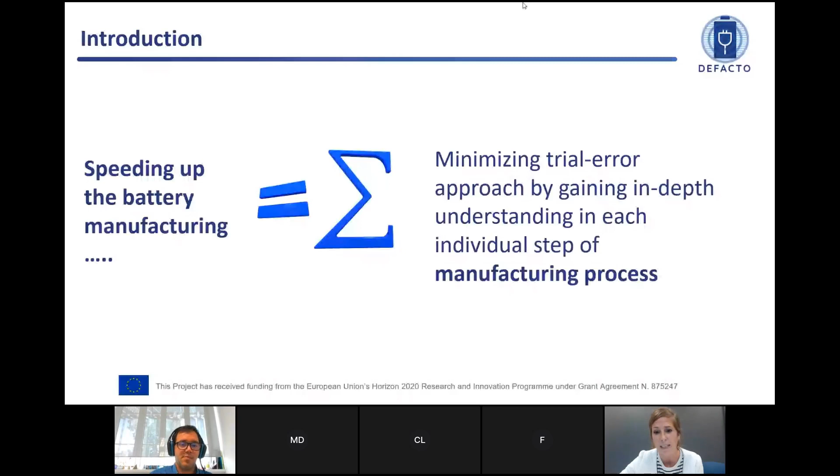One of the aims is to minimize the trial and error approach by gaining more understanding of individual manufacturing steps. Then, obviously, we have the cell, and the cell degrades along the cycling, and we want to know more about this degradation mechanism so that later we can enhance cell performance.

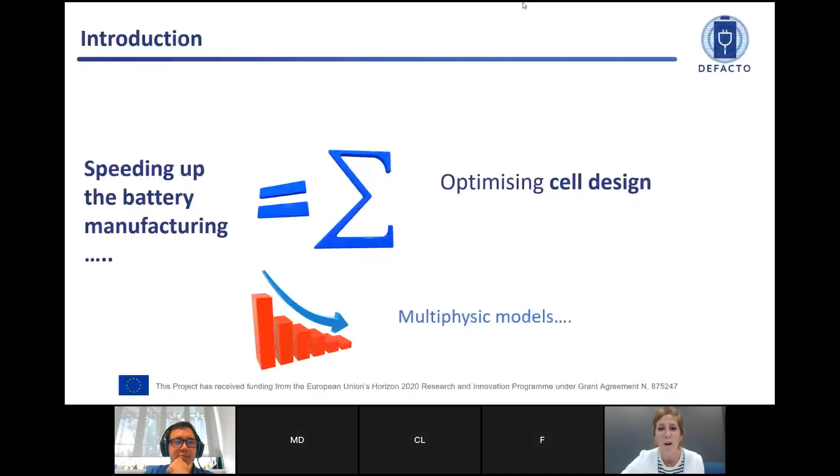We also want to optimize the cell design, and this should be done in an automatic way, linking at least to the manufacturing. So what we aim to do through the Defacto project is rely on multiphysics, because we are convinced multiphysics models can answer all these aspects, speeding up battery manufacturing.

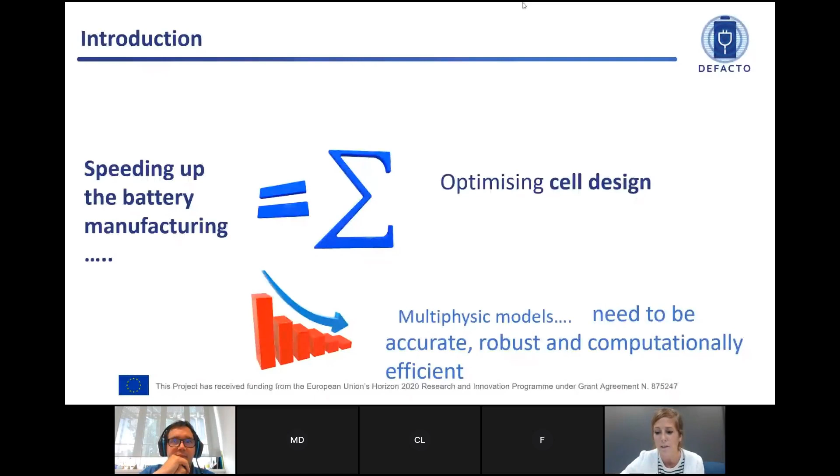But then multiphysics models need to be accurate, robust, and also computationally efficient. So for today, I have prepared and divided the presentation into 4 topics.

One is the parametrization, how models can contribute to parametrization, improving or reducing the number of experiments needed to estimate the parameters. And then on the manufacturing process.

The third part of the presentation will be on the degradation mechanisms from the multi-scale approach. And then I will finalize the presentation by giving some information on how we are proceeding in the optimization loop for optimizing cell design.

So I will start with the parametrization, and somehow models-based parametrization, in a way that we propose to reduce the time and experimental work dealing with the parametrization.

Within the Defacto project, we have more than 10 models that will be developed within the whole project, which started last year and will run until 2023. We have models related to manufacturing and also dealing with performance and aging. All of them have something in common: they are multiphysics and they cover different scales.

These multiphysics models require physicochemical parameters, and obviously you can rely on literature data. But if you have a particular chemistry, we are convinced that we have to go into detail and get insight on each individual parameter. So we have plenty of parameters.

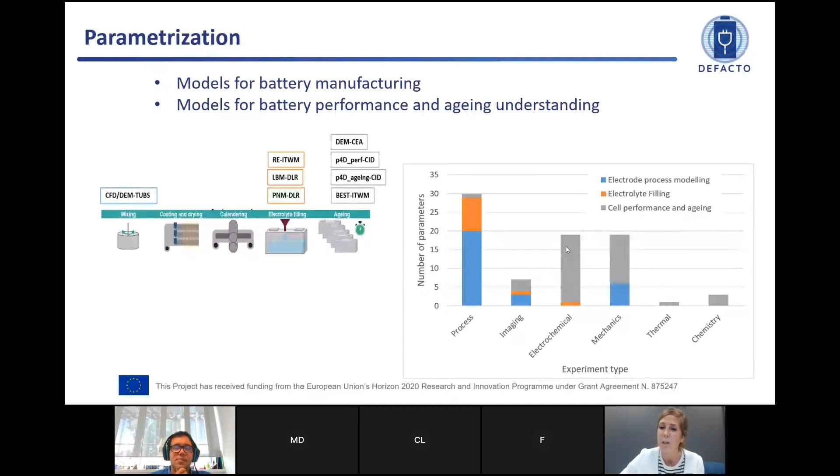Now I will show 2 examples of how we are dealing with, or proposing, models-based parametrization. Both are in the area of the continuum scale, but it gives an example of how we aim to work on facilitating the parametrization. When we talk about the continuum scale, for instance, the P2D model requires electrolyte transport parameters.

These are the 4 common transport parameters: the ionic conductivity, transport number, electrolyte diffusion coefficient, and the thermodynamic factor. Within Defacto, we have already taken measurements using experimental methods, and what is different about each individual parameter is that we need a specific method and even a specific setup.

So for instance, if we look to the ionic conductivity, we need to assemble symmetric stainless steel cells, and then perform the EIS measurements. For the transport number, we need to assemble a symmetric lithium-lithium cell, and we rely on the Bruce-Vincent method, basically a potentiostatic measurement combined with EIS spectra.

For the electrolyte diffusion coefficient, we need a symmetric lithium-lithium cell, but in this case we run galvanostatic pulse relaxation, and then we get the electrolyte diffusion coefficient. And for the thermodynamic factor, we need to assemble a 3-electrode configuration and perform CV experiments.

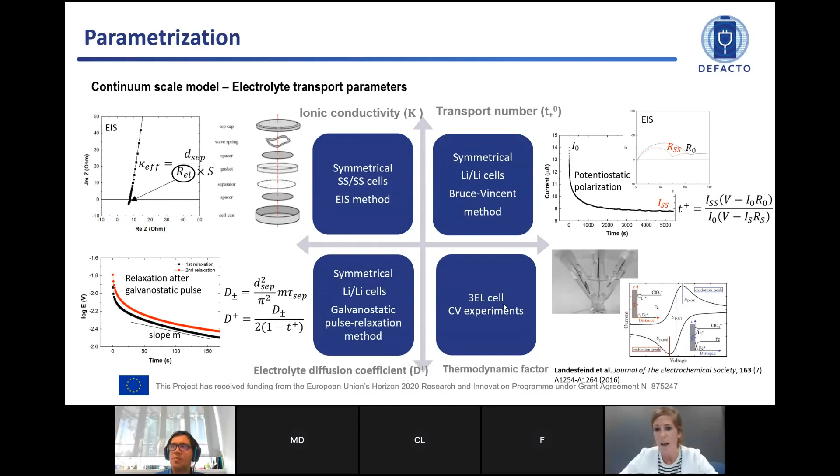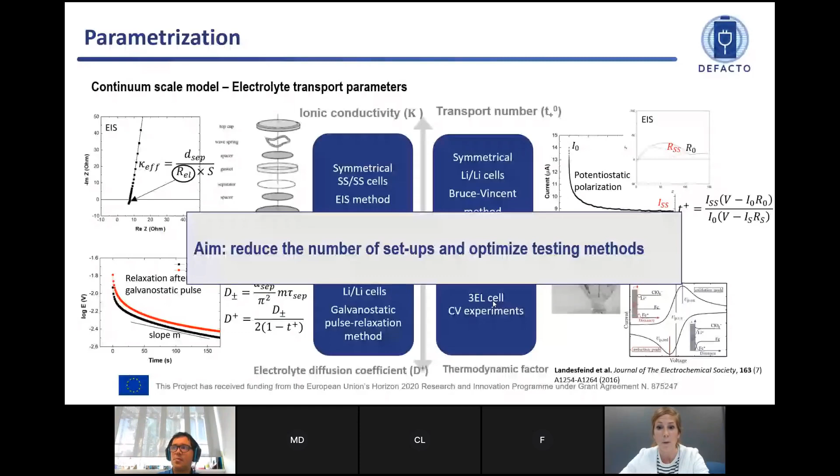So basically, this requires a huge amount of experiments. It's quite tedious and time consuming. So our aim here is to reduce the number of setups and optimize the testing methods, and this will be done by the model-based parametrization, as I was mentioning.

So here we are focusing now on electrolyte diffusivity estimation. From the experimental approach, we have to assemble lithium-lithium symmetrical cells, and then perform galvanostatic pulse relaxation. From the relaxation, if we plot the logarithmic of the voltage and get the slope of this figure, we can then get the diffusivity. But for that, we need the transport number, which we get from the Bruce-Vincent method.

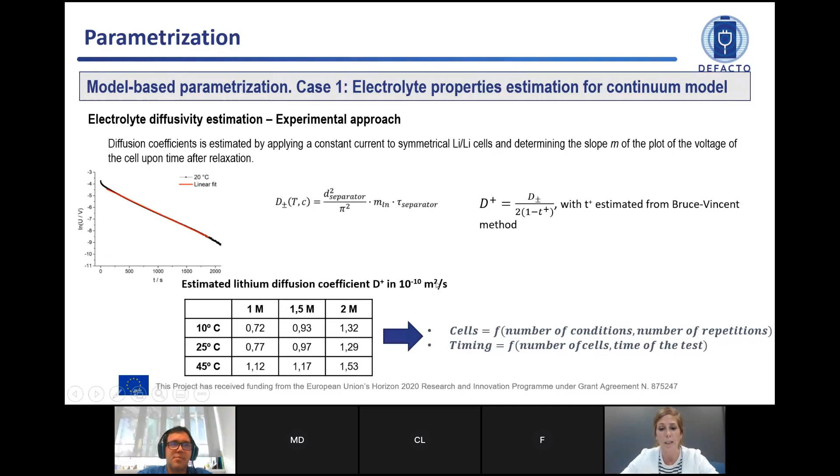So this is quite tedious, and as we know, the electrolyte diffusion coefficient depends on the salt concentration and on the temperature. So if we want to increase the number of values depending on these variables, the number of cells to be assembled would be huge, and it's quite time consuming.

So what we are proposing here is to rely on reduced order models, because in the end we need to solve an optimization problem that basically wants to minimize the error between the simulated voltage and the experimental voltage, and this is quite time consuming. So we need efficient codes or efficient models that mimic all the multiphysics, then perform this optimization algorithm to estimate the specific parameters.

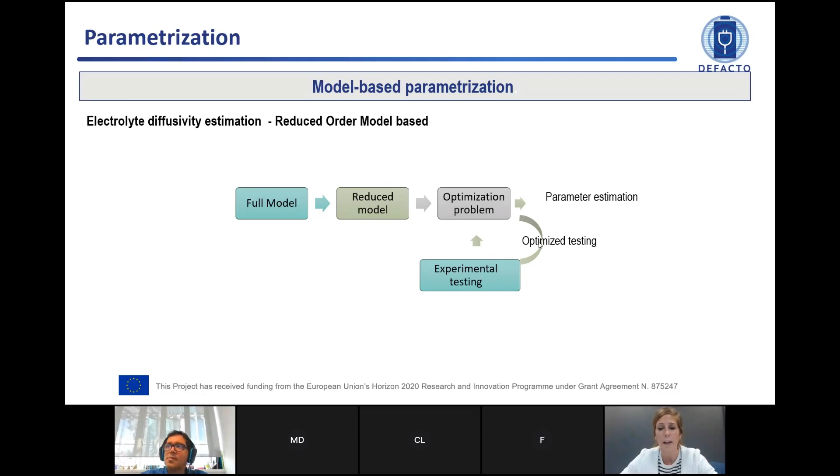So we need to have the full model, then we build the reduced model, and we implement, for instance, quasi-optimization problems to first optimize the testing in order to evaluate and get estimation of the parameters properly, efficiently, and accurately. So for the case of the electrolyte diffusion estimation and the pulse relaxation method, this is the model for the concentration gradients within the separator and electrolyte.

So this is the model that we usually discretize using the finite element method in Python, thanks to the FEniCS library, and the simulation time takes around 10 seconds, which is not much, but then if you want to solve the optimization later, it might be huge.

So here what we aim is we have already built these reduced order models. Basically, in reduced order models, there are different ones, but here we have implemented the pre-process one that basically relies on POD and DEIM. POD stands for proper orthogonal decomposition, which starts from high dimensional systems and projects the dynamics onto lower dimensional systems. DEIM is used for the nonlinear equations or nonlinear correlations, which are very important here.

So what we need to run in the pre-process stage is many simulations to get the snapshots and generate a database. Then with this database, we implement singular value decomposition to obtain the representative modes, and later we analyze by POD and linearize by these methods. By doing this, we can reduce the computational cost from 10 seconds to only 1 second, solving exactly the same equation and having exactly the same profiles of the concentration gradients.

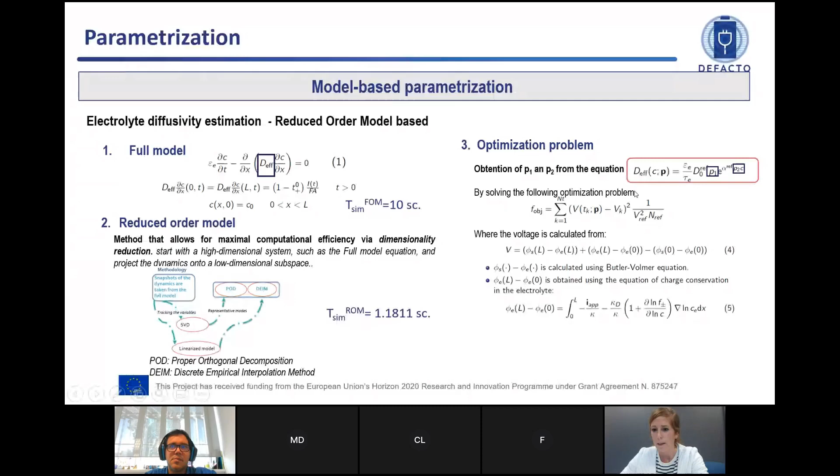So these are the equations, solved by the BFGS method. So yeah, this is P1 and P2. And this was the aim.

What we've been doing is running simulations with synthetic tests. In this case, we took literature data for the electrolyte diffusion coefficient, and we know the pattern it follows, which is the blue line below the red one here. So this is the target.

We need to identify exactly this pattern for the electrolyte diffusion coefficient. We identify the best testing condition so that for one test or one cell, we can properly identify the parameter. We did this in an iterative way, making trials with different testing protocols, and came out with this specific test. Running this test, we got exactly the same pattern, so we can say we are able to properly identify this parameter using only one test for a specific cell.

In this case, we have the correlation between the electrolyte diffusion coefficient and the concentration, so we can say we've found a way to reduce the number of cells needed. Now we are working on extrapolating this estimation to other transport parameters, like ionic conductivity and transport number. In this sample we took into account the relaxation, but for these new parameters we are also taking into account the pulse period.

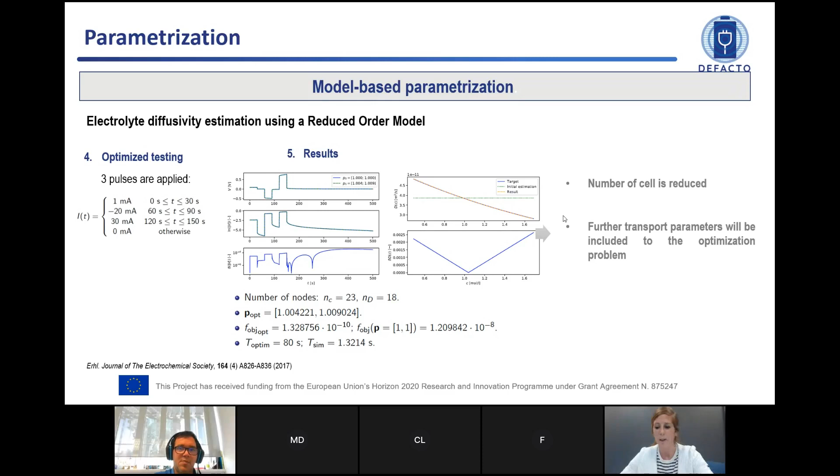Now I'll jump to the second case. I'm happy I attended the previous talk on graphite-silicon, because it's something we are working on, but at the continuum scale. Within the DEFACTO group, we have an electrode that is graphite composited with silicon.

Here we aim to build this continuum scale model based on the P2D approach, but with a new level. This detailed model was developed in order to account for the mechanical properties of the silicon, which might have a large impact on degradation as well. Here is the half coin cell configuration with this graphite-silicon.

We already have level 0 of the model, the typical P2D equations, then the graphite, where we have lithium diffusion along the particle. Then we have the carbon matrix, a representation of this carbon matrix, and inside we have the silicon particle.

In level 1, we have the diffusion of lithium along the carbon matrix, and we include the lithium exchange between the carbon and the silicon. We can even include another level where we consider the diffusion of lithium along the silicon.

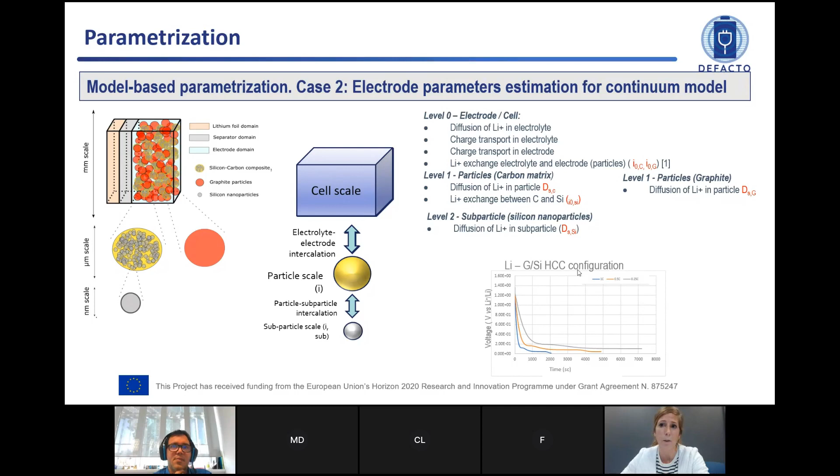These are the results at different C-rates, considering parameters from literature. Something we've been working on is how to obtain these parameters for our specific case. We rely on electrochemical tests and GITT experiments, which we've used in the past to obtain the OCV and solid diffusion coefficients.

Here, instead of applying an analytical equation, we want to include the full model, but it's quite computationally expensive, so we need to reduce or simplify it. What we have pursued is the following method.

First, we quantified the characteristic time of each individual mechanism and compared it to the characteristic time of the relaxation period in the GITT. Considering these results, we built a limiting model, and with these models we compared to the testing protocols. Then we implemented a quasi-Newton approach for the optimization problem, and later estimated the parameters.

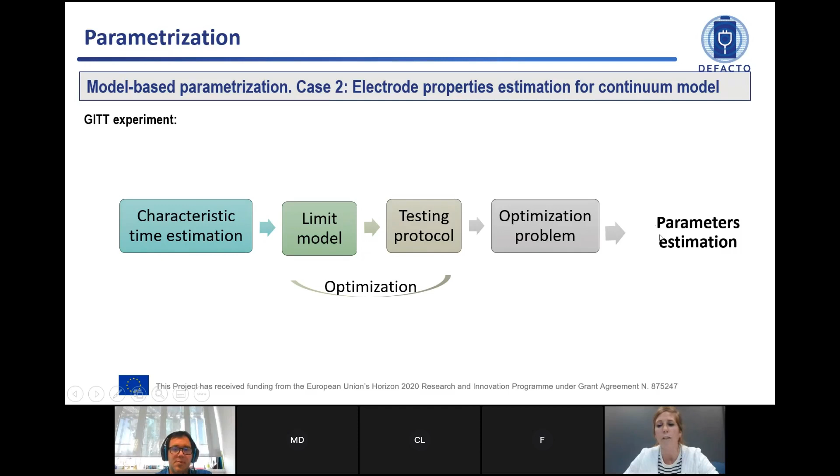What we did here is, as I said, calculate the characteristic time. What we have is the time related to the relaxation, shown by this black plateau line.

So first, it's worth mentioning what we want to obtain here: we want to identify the dominating dynamics or mechanisms that we will be observing in the GITT experiments. The fastest ones we are not able to identify, so it doesn't make sense to include them in the limiting models used in the GITT optimization.

If we look at this frame, we can see the following outcomes. First, we have the orange line, related to the diffusion in the carbon phase. What we see is larger than the relaxation time, so this means this one is dominating and we will see it in the GITT.

Then we have the red line, which is this one, and again we have a certain peak at a certain SOC. In this case it's something we really also observe in the GITT, and it's dominating again. Then we have this blue line, related to the diffusion in the graphite, and it's a little bit under the relaxation time, so it will be faster and we won't be able to see it.

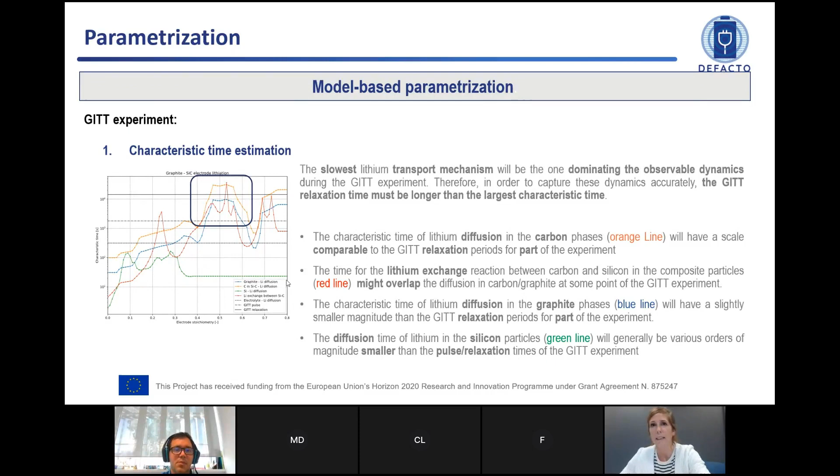Considering this, we have built these limiting models. First, some assumptions are that the potential, both ionic and electronic, and even the electrolyte diffusing concentration, don't vary significantly along the electrode thickness and during the relaxation.

Then, considering the characteristic time we obtained based on literature data, it's much smaller than the others, so there won't be any concentration gradients, and we can assume it's at plateau. For these limiting models, we account for the diffusion of lithium in the electrolyte, approximated by the spectral method just to make it more efficient.

In level 1, we will have carbon and graphite that is not taken into account, but we also consider it here. Here we are taking into account the diffusion of lithium in the particle, even the exchange between the carbon matrix and the silicon. What we are eliminating in the limiting model is the diffusion of lithium along the silicon.

So here again we apply a quasi-Newton approach to minimize the error, identify the objective function, and obtain the value of the diffusion constants. Basically what we did is assume there was very fast kinetics between the silicon and the composite, so we were able to identify the diffusion coefficient.

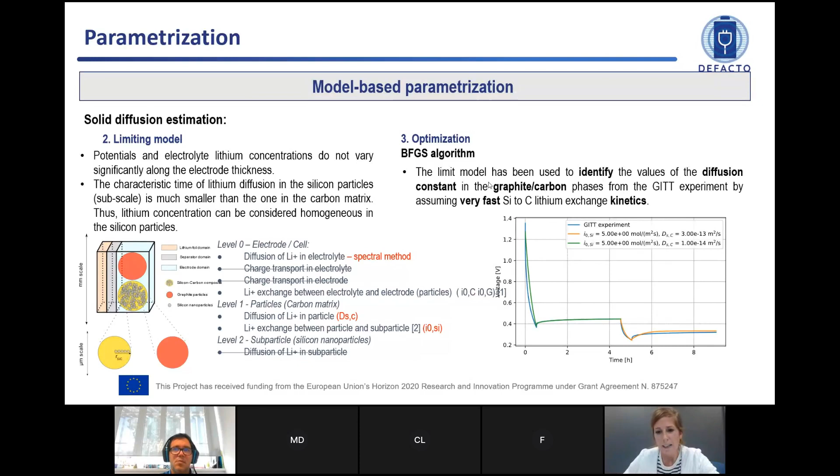So now I'm jumping to the manufacturing process. It's another topic that we're really dealing with within DEFACTO. The idea is obviously to gain more understanding of each individual step.

First, I would like to point out that within DEFACTO we have prototype cells, but also commercial cells developed in an industrial manufacturer, and prototype cells manufactured in research and universities.

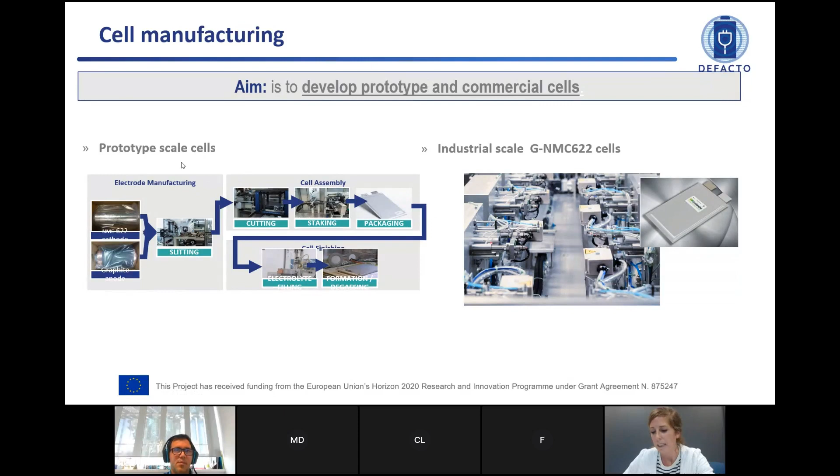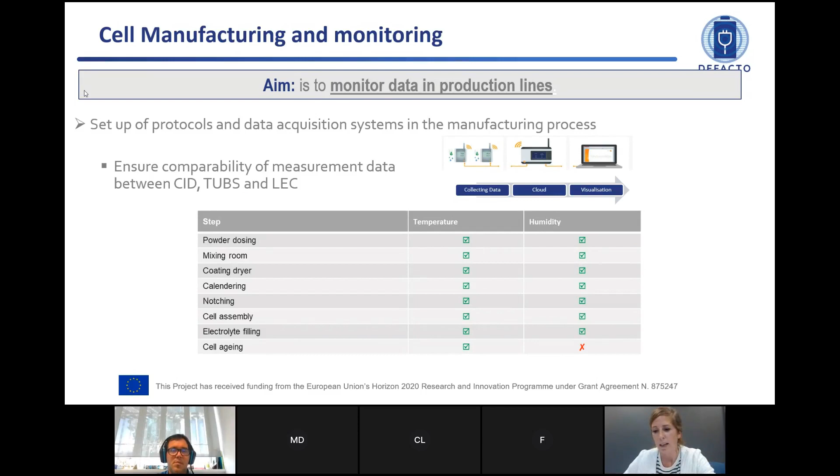Also, something to take into account is the parameters from the processing. What we aim for here is how to monitor the data in the production line. We are currently working in this field, and the idea behind it is that we need to be very homogenized, tracking or monitoring exactly the same parameters in the three facilities in order to later compare the results and have comparable data.

Then we have this physicochemical and electrochemical characterization that provides insight on the products, basically the cell, but also the intermediate phases or intermediate products of the manufacturing process. So we will be characterizing material, then electrode, and even the electrolyte filling process is already being investigated through a specific setup.

And then, once we have the cells and prototype cells, large cells by the way, we will start running the aging tests soon.

Okay, so now coming to the modeling field. In the modeling, as I said, we want to gain more understanding on certain specific steps of the manufacturing. Basically, we will be concentrated on the electrode processing and also the electrolyte filling process, which are one of the most critical ones.

So for the electrode processes, we start from the slurry preparation, jump to the coating, and then calendering. And then once we have the cell assembly, we will deal with the electrolyte filling.

So for the slurry preparation, we know that the carbon black agglomerate size distribution has a really high impact on the rheological properties of the slurry. So here, what we aim to do is to understand and analyze the breakage of the carbon black agglomerates simulated by the CFD-DEM.

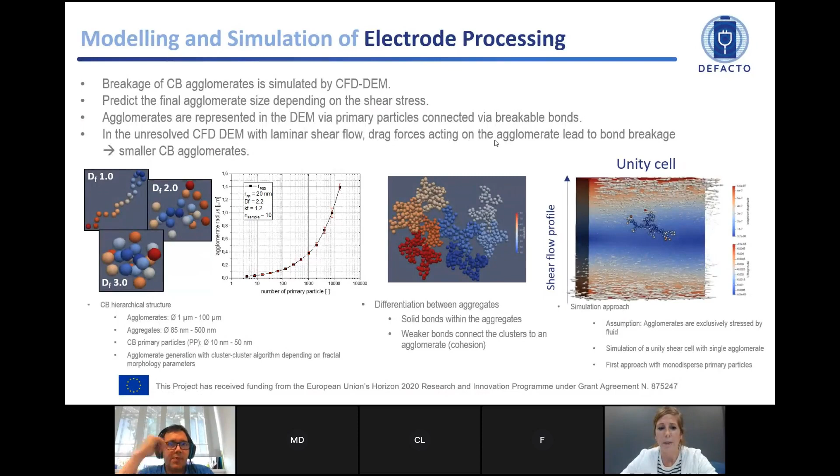Basically, we aim to predict the final agglomerate size distribution depending on the shear stress. The agglomerates, represented in the DEM, consist of primary particles connected via breakable bonds. So within the unresolved CFD-DEM with laminar shear flow, the drag force acting on the agglomerate leads to bond breakage, which produces smaller carbon black agglomerates.

Once we have this carbon black agglomerate size distribution fixed, we proceed to the drying conditions, and there we aim to study properly the effect of this drying condition on the structure formation. For this, we need to rely on two different size scales: the unresolved CFD-DEM coupling, and the resolved CFD-DEM coupling.

Talking about the unresolved CFD-DEM, we aim to investigate the active material at the mesoscale, or the carbon black at the microscale. From the resulting results, the simulation mimics, or is comparable to, the experimental results, as can be seen here.

For the resolved CFD-DEM coupling, we aim to investigate how the active material structure is formed at the microscale. You can see examples here of single particle displacement, and another example of 8 particles in a cubic configuration displacement through the drying steps. Having this information in mind, we can later proceed with optimization and validation.

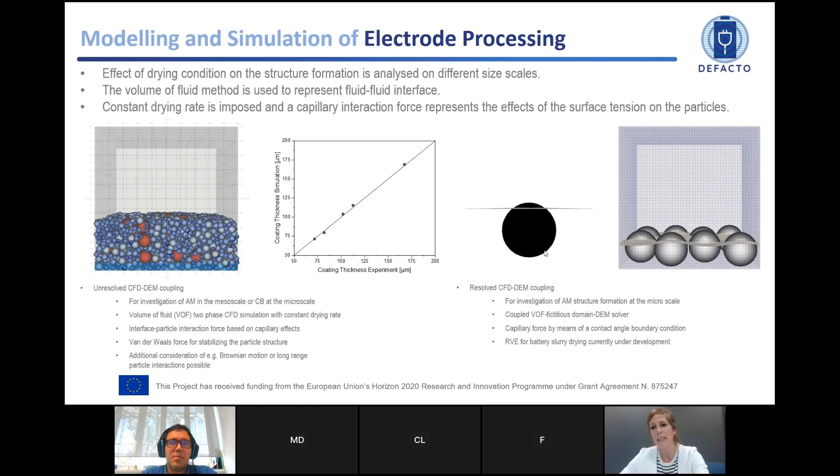So now we jump to the calendering. Once the microstructure is fixed, we apply pressure to a plate, and we use DEM models to investigate this calendering process.

In here, we take into account the binder, which is represented by interparticle bonds, already included in the DEM. Also, adhesion to the current collector is included and represented by the extended contact model, and the effect of the heated calender is also taken into account. Taking all this into account, we are later able to optimize the calendering step.

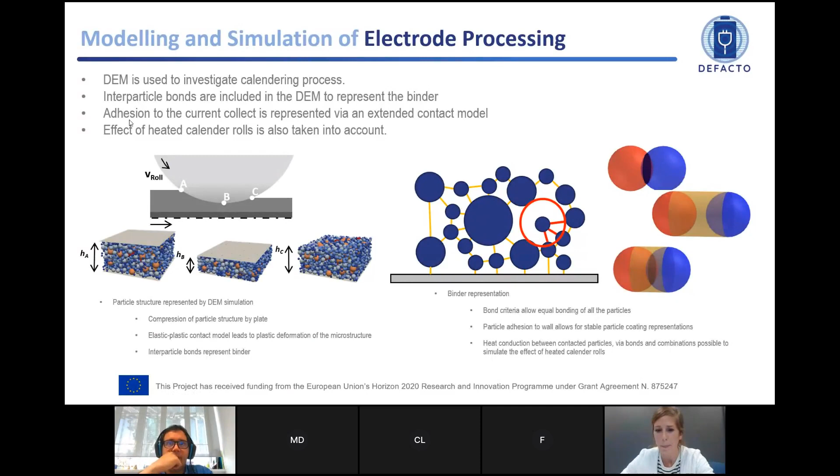Now we proceed with the electrolyte filling process. Once we have the electrode, you need to proceed with several steps, and once you build this and assemble the cells, you need to fill with electrolyte. This step is very critical, taking into account economic and electrochemical aspects. It's time consuming, and the wettability might impact the premature degradation of the cell.

Within DEFACTO, we cover two scales and different models to evaluate and analyze the electrolyte filling process, starting from the mesoscale and jumping to the cell level. So we analyze pore level, electrode level, and cell level. What's being shown here is based on two-phase flow using the lattice Boltzmann method.

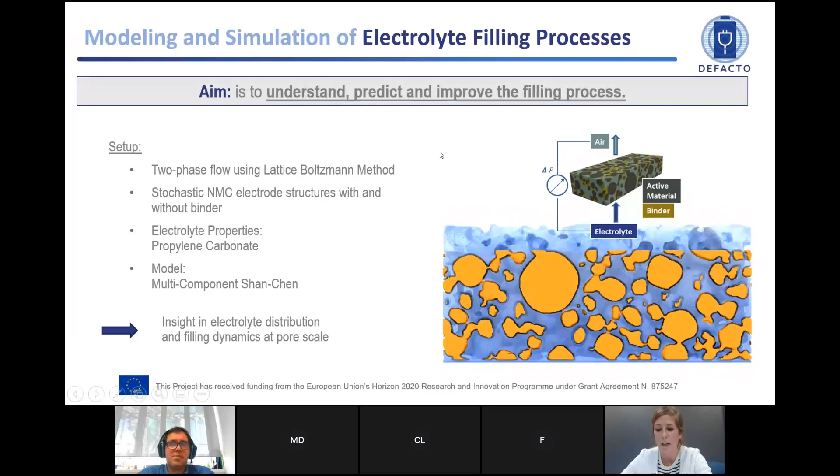Virtual electrodes are configured, taking into account the active material with and without the binder. For this setup, the electrolyte properties mimic propylene carbonate properties, and the model itself is based on the Shan-Chen approach. We want to evaluate the pressure gradient and the saturation percentage, depending on parameters like porosity, wetting behavior, and so on.

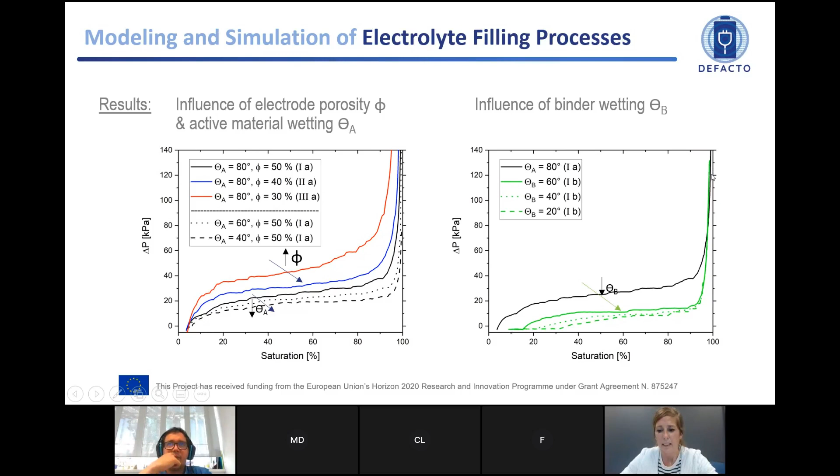Another outcome of the lattice-Boltzmann approach is that we can see the final state of the saturation, and here we can evaluate the gas entrapping. So depending on the porosity, it might have certain difference between the entrapping of the gas bubbling in the electrode.

With the highest porosity, apparently there's certain gas bubbling on the surface of the active material, while in the lower porosity regime, we see that the gas bubble agglomerates are mainly in the pore structure.

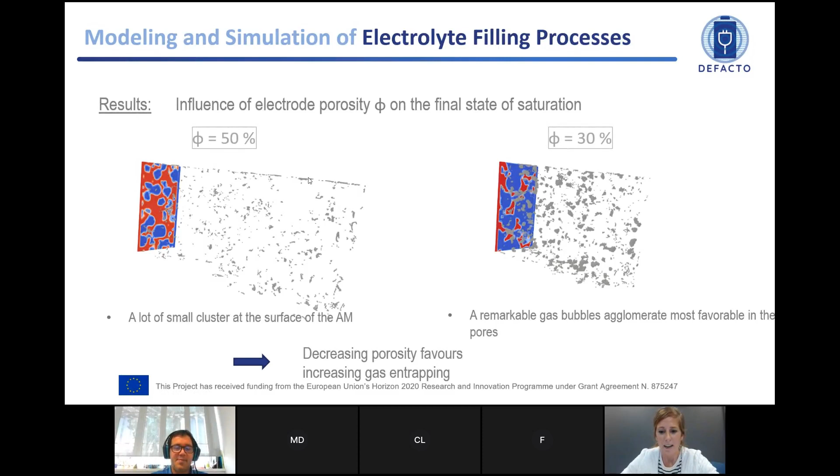This issue is really important, because as we know, the OEM requirements are towards reducing the porosity and increasing the energy density. So obviously all these parameters are really important to track and to correlate to this manufacturing process.

Yes, and now I jump to the third part, which is basically gaining more understanding on the degradation mechanisms. Within DEFACTO, we aim to solve this problem by the multi-scale approach, starting from atomistic, meso, and continuum.

What we aim in DEFACTO is to concentrate on the graphite silicon electrodes and mainly on the mechanical aspects of the silicon. We know this is something very important, the swelling of the silicon and how it's impacting on the structure of the graphite and even the SEI layer.

First, what we want to compute, we have to start running a simulation at the atomistic level, and then we came out with some values of the expansion, for instance in the atomistic scale with the lithiation state. Also, we have applied certain pressure and see how the external pressure is influencing the potential, but not the volume.

We have also analyzed the difference between crystalline silicon and amorphous silicon, because the bulk modulus are also completely different from one to the other.

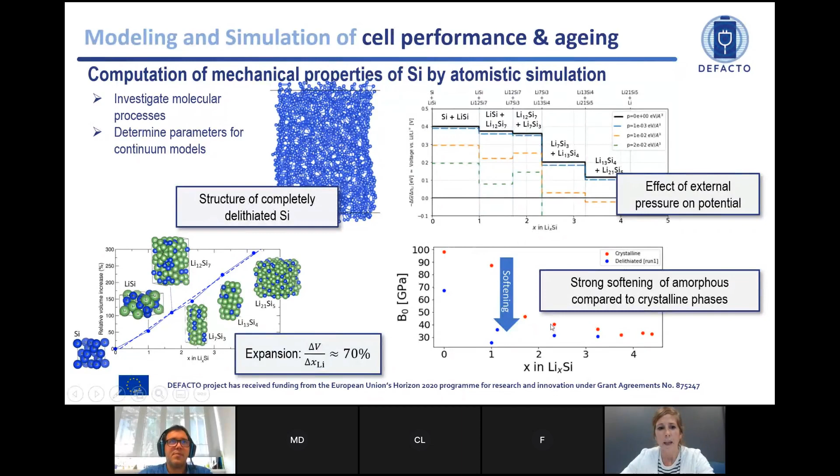Once we have these mechanical properties understood at the atomistic level, then we go to the mesoscale. Here we have two methods: one is the 3D resolved model, the other one is the DEM method. Basically in the 3D resolved, we are coupling the electrochemical tool to the mechanical tool.

Here again, the idea is to properly analyze the volume change with the SOC, also to gain more understanding on the stress and how this stress is impacting on the degradation of the cell.

Then obviously once we have this understanding, we'll upscale to the continuum scale where we will be running tests with the large cell configuration.

Also, as I said, we have a different approach in the mesoscale: discrete element methods. Basically, we run simulations in order to understand properly the mechanical and stress behavior depending on certain parameters.

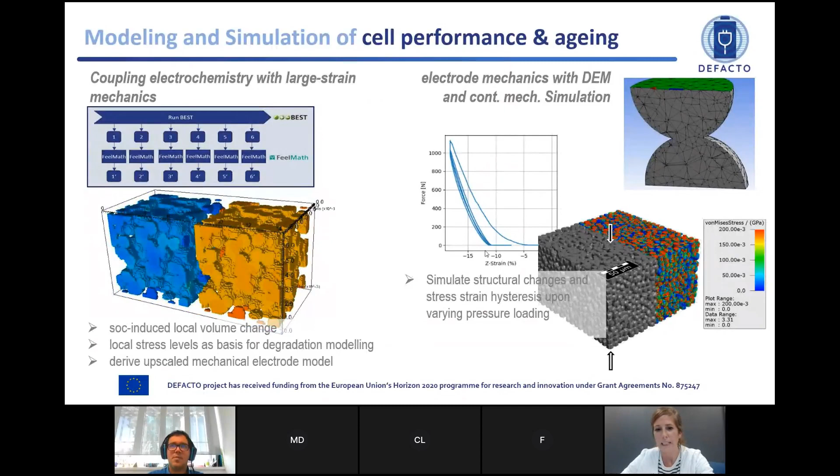These are complementary work, but I think they give a huge amount of information to the next scale, which is the cell level or continuum scale.

Basically, we've been working on homogenizing the model to account for the silicon carbon composite anodes. Obviously this homogenization to the continuum somehow includes this phenomena, but simplifies it in a way that is still quite computationally efficient.

And then also we go to the P4D approach, in which we take into account the large scales of the cell.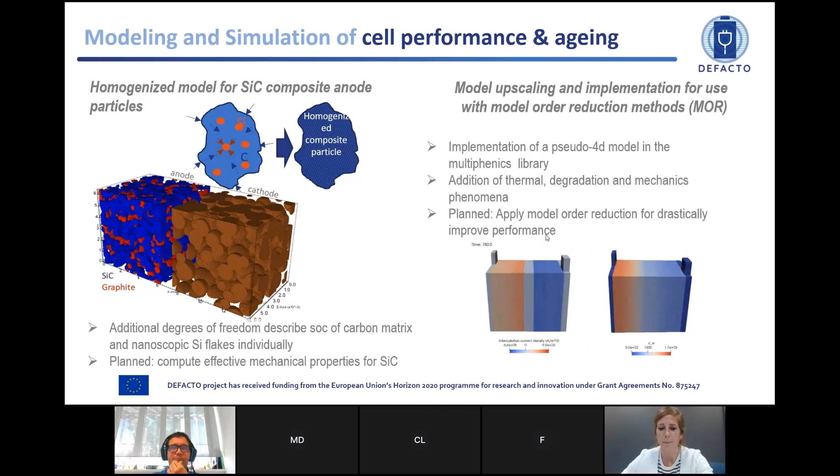And then I jump to the fourth part. I don't know how much time I have. Sorry, Alejandro. I think you still have 10 minutes, including questions.

Okay, thank you. The last part is about optimizing the cell design. As I said, we again rely on model-based optimization. When we say optimization, we are dealing with cell optimization, but also correlating cell parameters to the manufacturing parameters. So somehow we close the loop between cell aging and manufacturing.

The method that we will be pursuing is the following: we have the P4D model, and taking this as a baseline, we build reduced models in two different approaches. One is the reduced order method, and the other one is a regressive model, SPGD, a non-intrusive method.

Once we have these reduced models, we aim to build the optimization similar to the approach in the parametrization. Here we aim to identify, obviously we'll be doing some sensitivity analysis to identify the critical parameters so that we can later find the optimum, pursuing certain energy density, power density, or cycle life. Once we've identified the most important parameters, we will link them to the manufacturing parameters.

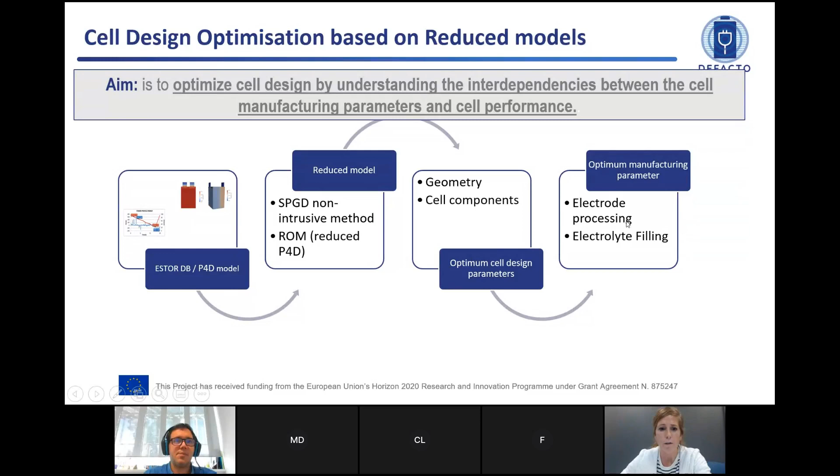So far we've been working on the reduced models, and as I said, we have two approaches. One is based on the POD method, similar to what I presented previously, but that one was pre-processed models. Here we go further, and our reduced model is time adaptive. The difference between both schemes is shown here.

Basically, when needed, at the beginning the reduced model I presented was relying on many snapshots, and we need to build a huge database. Once we have this database, we build the reduced models by POD, DEIM, and so on, and we run the simulation with the reduced model.

Here what we do is combine or start. We can run experiments with this pre-processed data. Otherwise, if we don't have this data, we can just start running the full model, and once we have certain snapshots, we can jump to the reduced model, build it, and continue with the reduced model.

In parallel, what we do is measure the residuals and see if the error between the reduced model and the full model is good enough or not. If not, we should jump back to the full model, and continue with it until we have enough snapshots, and then with these snapshots readapt the reduced model.

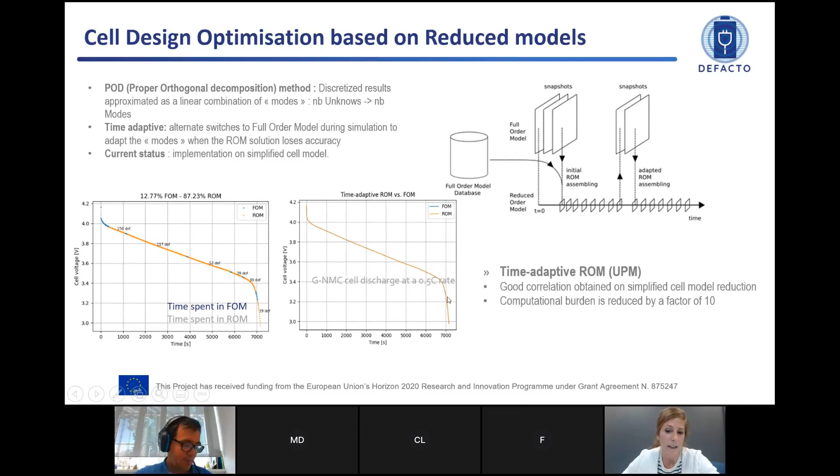This is an example showing there's no real difference between the results of the full model and the reduced models; you can't see any difference between both of them.

Then we have the other option, which is basically to develop a regression model. With this regression model, it's another way of simplifying the models. What we aim here is to somehow combine the simulation results that come from the ROM model with experimental results, and build hybrid twin models, or hybrid models, that combine both aspects.

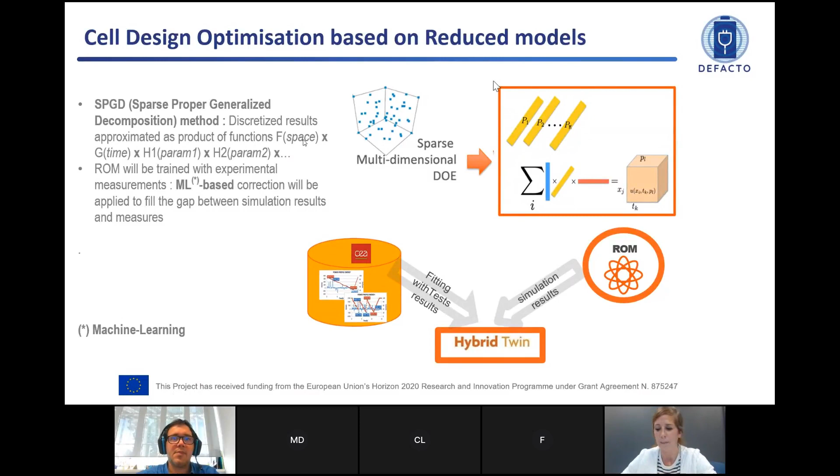So this is what we have done so far, but we will be including these ROM models into the optimization and further steps. With this, I would like to thank the whole consortium. We are 13 partners and we're doing a great job, I think. As I said, we started at the beginning of last year, and we'll go until the middle of 2023. Thank you for your time.

Thank you very much, Elixabete, for a really nice overview of what is being done in DEFACTO. Definitely a lot of synergies with Artistic, I think, a lot of ways of collaborating, which I find very, very nice. So, okay, we have several questions waiting for you, right, Fernando?

Yes, indeed. Let's start here with Jean, who will speak later, actually. So she asks the following: for the LBM filling model, what is the density ratio between the air phase and the liquid phase? And if the ratio is high, would you mind telling me more about the technique you use to stabilize the model?

I think it's a really interesting question, but I'm sorry I don't have the answer, as I'm not in charge of these models. Maybe what I could do is, if you write me an email, I could put you in contact with the people in charge of this activity, by the way, that's DLR.